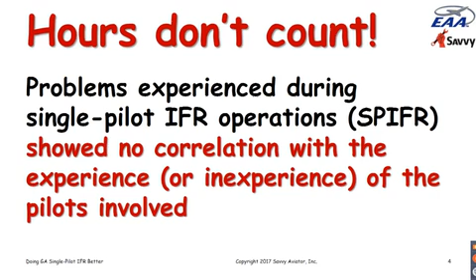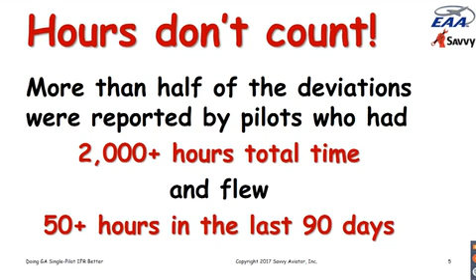Some of the findings of the Battelle study were pretty counterintuitive. For example, they found that hours don't count. The problems experienced during single pilot IFR did not show any correlation with the experience or inexperience of the pilots involved. In fact, more than half of the deviations were reported by pilots that had more than 2,000 hours total time and flew more than 50 hours in the last 90 days.

So these were very active and experienced pilots making these errors. It also turned out there was no significant difference in the types of problems experienced by high-time pilots versus low-time pilots, or by pilots of larger aircraft versus smaller aircraft. Those conclusions I found kind of surprising, because one would intuitively expect that higher time pilots and pilots of larger aircraft would make fewer mistakes, but it turns out that they don't.

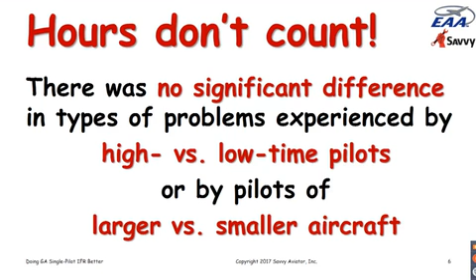The conclusion of the study was that the remedies to the problems GA pilots face flying single pilot IFR don't lie in more training or having more experience, but rather in changing the nature of the single pilot IFR task itself through improved cockpit discipline. And that's what we're going to be talking about for the next half hour or so.

The reports studied in the Battelle study were overwhelmingly pilot deviations. There were some reports where pilots were complaining about inadequate ATC service, but by and large the study was focused mainly on pilot deviations. So we'll talk about pilot deviations, and here's a breakdown of the kinds of deviations, the broad classes of deviations that Battelle found during the study.

By far the largest number, 43%, were altitude busts of some sort or another. Bad approaches and heading deviations each accounted for around 20%. Position deviations, where an aircraft was simply off course, were about 10%. Loss of control was 5%, and other was 2%.

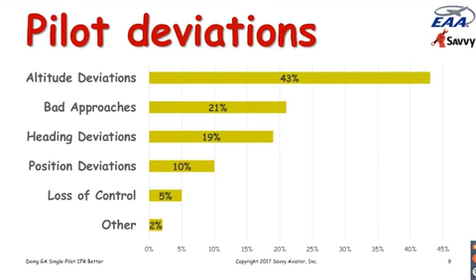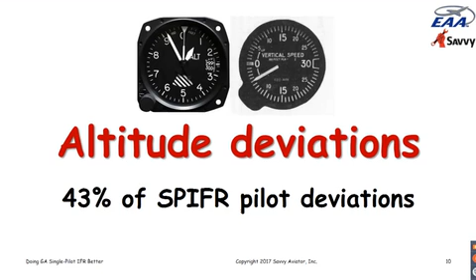So altitude deviations were by far the largest segment of the stupid pilot tricks that came out in this study. And the altitude deviations came in a number of flavors. The overwhelming majority of the altitude deviations were where a pilot was in a climb or a descent and overshot the assigned altitude.

Some other kinds of altitude deviations represented a smaller percentage, where a pilot changed altitude prematurely, undershot the assigned altitude rather than overshooting it, failed to change altitude when ATC instructed a change, or failed to maintain altitude. But the overwhelming majority of these deviations were overshoots, where the pilot was climbing or descending and simply didn't stop at the assigned altitude.

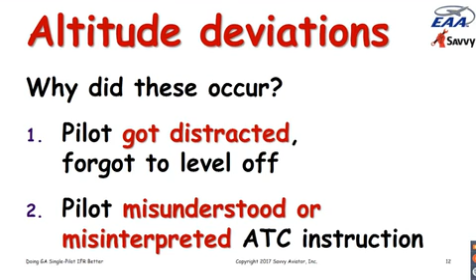Why did these altitude deviations occur? Battelle felt there were two reasons. One was that the pilot got distracted, and distractions are clearly a problem with single pilot IFR, because when workload is high, it's difficult for one person to keep track of everything. The second cause was that pilots misunderstood or misinterpreted the clearance they got from ATC, and so didn't really understand what altitude assignment they were getting.

And the misunderstandings came in a number of flavors. In cases where pilots misunderstood or misinterpreted the clearance, about half the time the pilot wound up climbing or descending to an altitude assigned to a different aircraft. Other lesser causes were climbing to the flight planned altitude rather than the cleared altitude, climbing to a requested altitude where the request hadn't been granted but they did it anyway, or in a few cases, climbing to the habitually expected altitude - where a pilot flying a route he flew a lot was used to being assigned a particular altitude, and in this case was assigned a different altitude, but climbed to the one he normally expected.

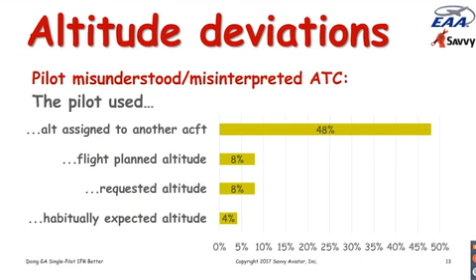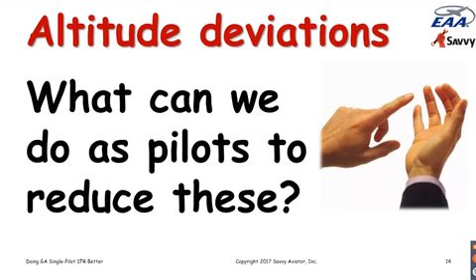So what can we do as pilots to reduce altitude deviations like this? It seems to me there are several things we can do. First, never act upon a climb or descent clearance unless you're 100% sure it was meant for you and not another aircraft. Again, the majority of altitude deviations were due to misunderstandings or misinterpretations, where an aircraft acted on a clearance intended for a different aircraft. So unless you're 100% sure a clearance was meant for you, always query ATC about it.

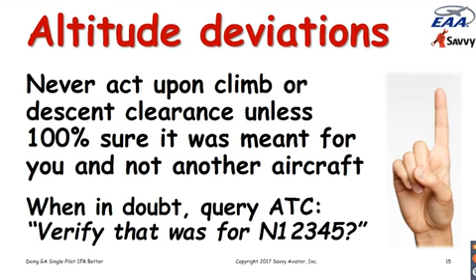Verify that this was for November 1, 2, 3, 4, 5. A second thing - because the majority of altitude deviations were overshoots, where the aircraft was climbing or descending and just climbed or descended right through the assigned altitude - is that every aircraft flying IFR really needs an altitude alerter. And nowadays you can buy them very inexpensively. I can tell you an altitude alerter is worth its weight in gold.

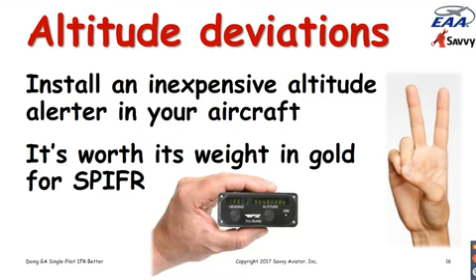I don't know how many potential altitude busts my altitude alerter in my Cessna 310 has saved me from, but it's absolutely worth its weight in gold. So if you're flying IFR in an aircraft without an altitude alerter, you really need to put one in. And it isn't very expensive nowadays - there are some very inexpensive ones under $1,000.

The third thing we can do, a habit I developed many years ago, is that when ATC assigns you an altitude, don't read it back immediately. First dial it into your altitude alerter, then read back the altitude you've dialed in. If you do it that way, it's impossible to read back the altitude correctly and dial it in wrong. Instead of reading back what the clearance was, you're reading back what you dialed into the alerter.

Now, if you don't have an alerter, and you really should have one, you could use the same procedure with a Post-it note. In other words, when you get an altitude assignment, first write it down, then read back what you wrote. Don't read it back immediately and then note it down, because there's a potential for mistake that way.

There are some other things you can do. If you have an ADF with a rotatable card, you can use it as a place to dial in altitudes. But an altitude alerter that actually beeps when you're approaching the assigned altitude is really worth its weight in gold, so it's a really good idea to have one.

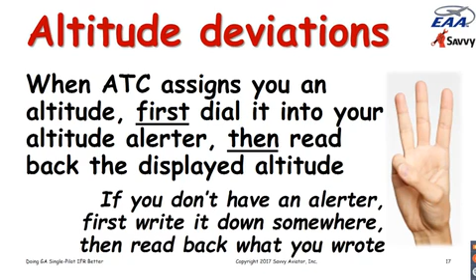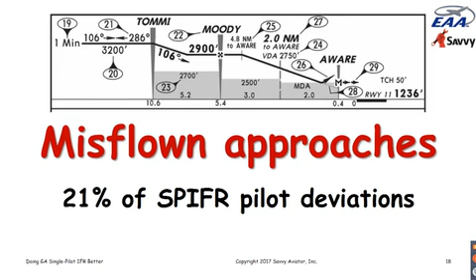Okay, the next most common category of pilot deviations were misflown approaches. They represented 21% of the single pilot IFR deviations. Now, the instrument approach is obviously the most workload intensive phase of any IFR flight, and because it's low to the ground, the consequences of making a mistake can be very, very serious.

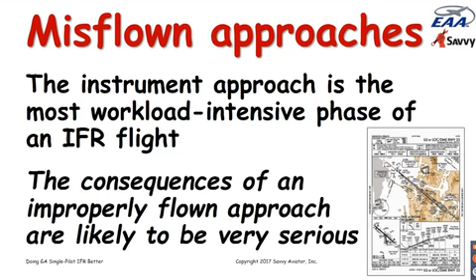Interestingly enough, and this was another counterintuitive thing, the study found that there was no correlation between pilot deviations and the type of approach flown. One might reasonably expect that more difficult approaches, typically non-precision approaches with lots of step-down fixes, would have a lot more pilot deviations than something like an ILS, where you're simply tracking the glide slope and not having level-offs. But that's not what was found. Half of the approaches that were screwed up were ILS approaches, which are normally considered to be the easiest of all approaches to fly.

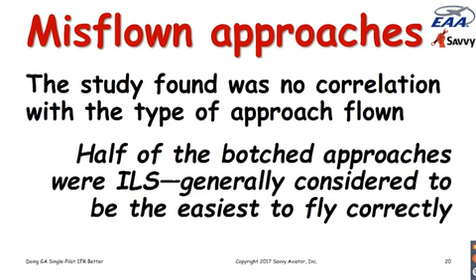A major factor in a lot of these misflown approaches was lack of positional awareness, flying a divergent heading that never intercepted the final, flying a localizer and never intercepting the glide slope, that sort of thing.

I think probably if the study were repeated today, there would probably be somewhat less of these, simply because now we all have GPS-driven moving maps in the airplane, which help a lot with situational awareness.

Another common error was unexpected course reversals. Typically, the pilot flew a procedure where ATC expected him to go straight in, but the pilot executed a procedure turn or a holding pattern that ATC didn't expect. In one somewhat humorous case, a GA pilot was assigned the runway 27L ILS at Chicago O'Hare and wound up making two 360s, causing the controllers to scatter a whole slew of airliners in all directions because the pilot did something that the controllers didn't expect.

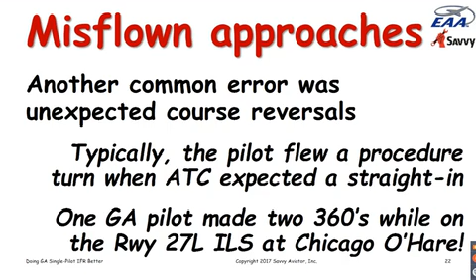Another thing that the study found was that the probability of a misflown approach was particularly high on second-try and third-try approaches, after the pilot had already missed one or more approaches.

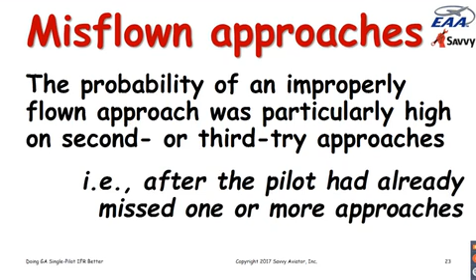So what can we do as pilots to reduce misflown approaches? Well, first of all, as I mentioned, we all have GPS-driven moving maps in our airplanes nowadays, whether they're panel-mounted or yoke-mounted or both, or an iPad or whatever. So use your GPS-driven moving map to help you stay positionally aware so that you don't do something that deviates from the approach.

I use a Garmin 696 on my yoke, an iPad mounted on my left cockpit window, and a Garmin 530 on the panel. So at any given time, I'm staring at three GPS moving maps, and if I get off course, there's not much excuse for it. The equipment that we have reasonably available today really helps in this area.

Second of all, use your altitude alerter to prevent inadvertent descent below minimums. Most altitude alerters have a decision height feature where you dial in the decision height, and then it provides you an aural alert when you get there. For non-precision approaches where you have a bunch of step-down fixes, dial each successive step-down into the alerter so that you can't bust that altitude.

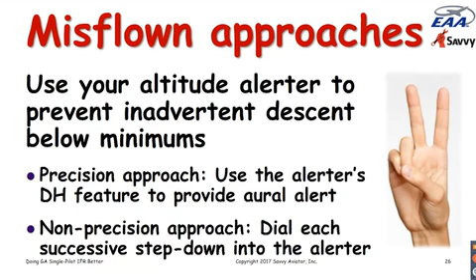And finally, never make a procedure turn or a hold in lieu of procedure turn unless you're absolutely positive that the controller is expecting it. Nowadays, procedure turns and holding for the approach is the exception rather than the rule, because we're in a radar environment.

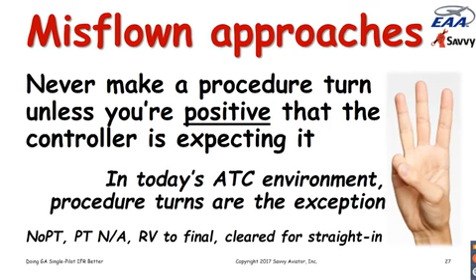Finally, think very, very carefully before attempting a second try approach. Missed approaches are due to one of two reasons: either the weather was below minimums, or the pilot was too tired or too rusty to fly the approach accurately. In both cases, things aren't going to get better on the second approach. So usually, if you miss an approach, diverting to an alternate with better weather is the wise choice. A lot of people have augured in after missing an approach and going back for a second or third try.

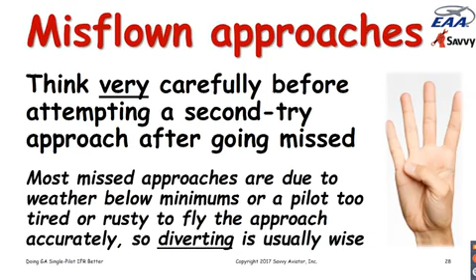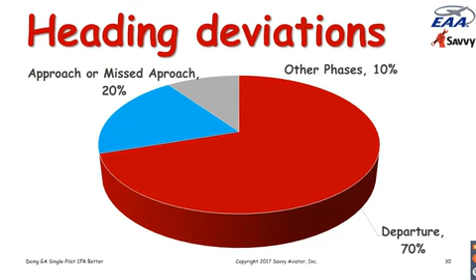The third category are heading deviations. Heading deviations occurred mostly during the departure phase, interestingly enough. 70% of them during the departure phase, 20% during approach or missed approach, 10% during other phases of flight. I found that a little surprising that the departure phase was the predominant phase during which heading deviations occurred, but that's what the study showed.

The breakdown of heading deviations: 44% wandered off of the assigned heading, 19% flew the reciprocal heading, 180 degrees from what they were assigned. 20% roughly failed to turn to the heading after they were given it, and 9% turned the wrong way. They were asked to turn left to a heading and turned right, or vice versa.

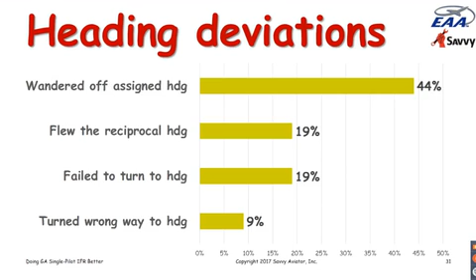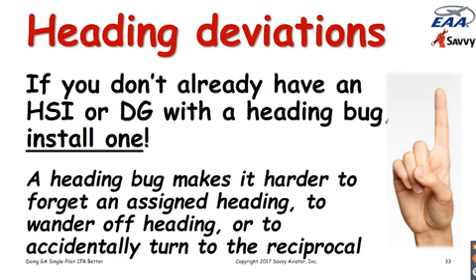So what can we as pilots do to reduce these kinds of heading deviations? First of all, if you don't have a DG or HSI that has a heading bug, you need to put one in. In the same way that we need an altitude alerter to remind us of altitudes, we need a heading bug to remind us of heading assignments. Having a heading bug makes it much harder to forget an assigned heading, or to wander off the heading, or to accidentally turn to the reciprocal, because we dial the assigned heading into the bug, and we have it sitting right in front of us on our compass card, where it's very, very hard to make a mistake.

If you have an autopilot with a heading hold feature... I personally consider an autopilot pretty much a no-go item when I'm flying single pilot IFR. In my early days, when I was younger and probably less wise, I did a lot of single pilot IFR without an autopilot installed. But nowadays, if I have an inoperative autopilot, I won't fly more than about an hour single pilot IFR, because hand flying single pilot IFR is just extremely fatiguing. Anyway, assuming you have an autopilot with a heading hold feature, use it, particularly anytime your attention is diverted. If you think about airline operations, those guys fly on the autopilot 99 and 44% of the time, and it's a good habit for GA pilots as well.

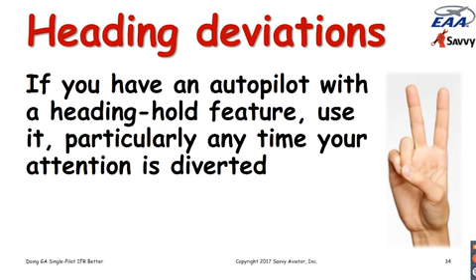When ATC assigns you a heading, the same thing that we talked about with altitude applies here. When you get the heading, dial it into the heading bug first, then read back the heading that you dialed into the bug. Don't read back the heading and then dial it. If you dial it first, read it back second, it's impossible to read back the heading correctly and dial it in incorrectly, which is a pretty easy thing to do if you don't follow that procedure. Again, if you don't have a heading bug, and you really should, use a Post-it note or a rotatable ADF card or something to record the assigned heading, then read back what you recorded. There are a number of different kinds of heading reminders that you can pick up very, very inexpensively.

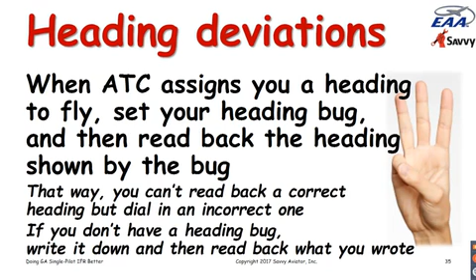As far as turning in the wrong direction, a heading bug makes it pretty obvious which way is the shorter way to turn. If the controller clears you to turn in the opposite direction, it's usually a good idea to confirm with the controller and say, verify that you want me to turn the long way around to whatever the heading is. Sometimes that's the case. That happened to me two days ago when I was departing Hawthorne, and the controller gave me a long way around turn that was a 270-degree turn. It's kind of an unusual clearance, so I verified it back to him that he wanted me to turn the long way around. You just want to make sure so you don't wind up turning the wrong way, the opposite way that the controller expects, inadvertently.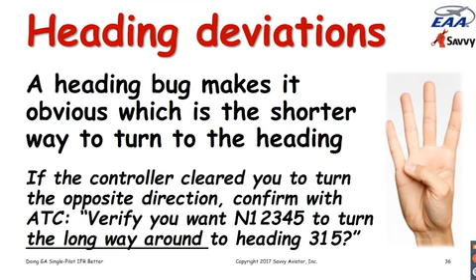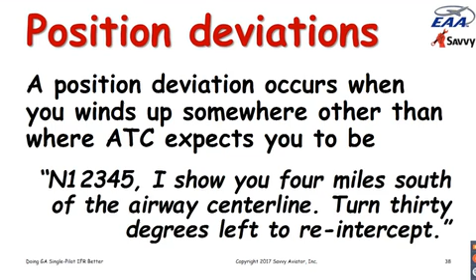Position deviations represented 10% of the pilot deviations, and a position deviation was when a pilot wound up somewhere other than where ATC expected the pilot to be. We've all probably had calls from ATC saying, say your position, or indicating that the controller didn't think you were where he expected you to be.

Almost all the reported position deviations in this study occurred during the cruise phase of flight, mostly while the aircraft was out of radar contact.

I'm just thinking back, the last position deviation I remember having was a case where I had put a fairly complicated route into my GPS navigator that the autopilot was flying, and I accidentally forgot a fix. So the airplane was flying what I programmed into the computer, but that wasn't the correct route because I'd left out one fix, and ATC called me on it. Very embarrassing.

In most cases in the study, the pilot was not aware of wandering off course until ATC said, say your position, or gave a turn to re-intercept or something like that.

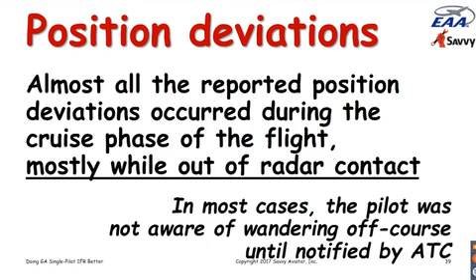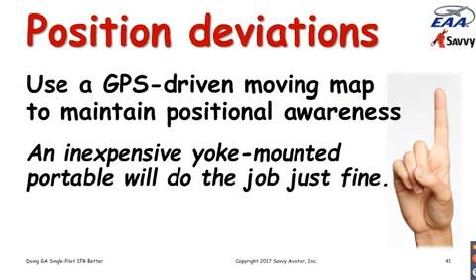Anyway, what can we do as pilots to reduce these position deviations? Again, use a GPS moving map to maintain positional awareness. A yoke-mounted portable does the job just fine, but you need to make sure that when you program your route into the box, that you do it accurately.

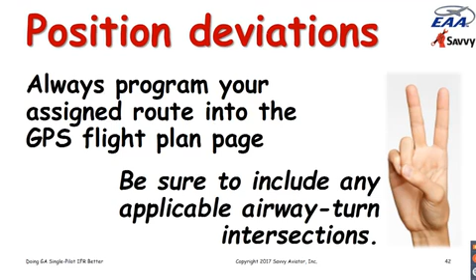The trick is to go over your route and make sure that you've entered all applicable turn points, whether they're VORs or intersections. You have to make sure not to forget any, or you'll wind up going off course. Again, if you have an autopilot with a navigation tracking feature, use that feature, especially anytime your attention is diverted.

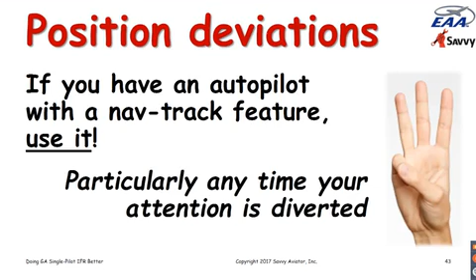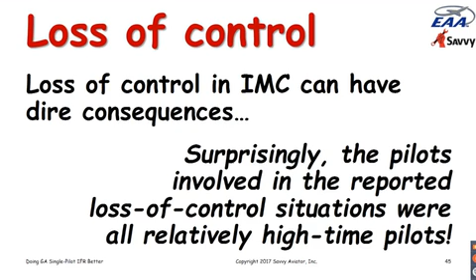Finally, 5% of the accidents involved loss of control. Obviously, loss of control in IMC can have very serious consequences. Surprisingly, the pilots involved in the reported loss of control situations were all relatively high-time pilots. Again, this is not an experience issue.

Most of the loss of control episodes involve pilots who got distracted and focused on something else other than flying the airplane.

I'm sure everybody remembers that L-1011 crash in Florida many years ago, where there were 3 crew members in the cockpit, and they were all trying to troubleshoot a problem, and none of them realized that the autopilot had disconnected. The airplane was flying without anybody paying attention, and it very slowly and majestically descended into the Everglades with 3 pilots up in the front office focusing on something other than flying the airplane.

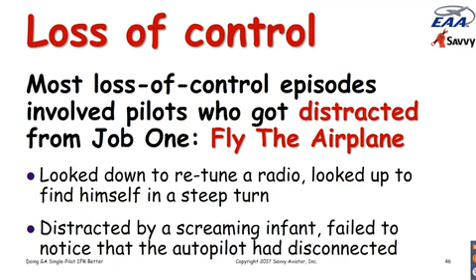Some of the loss of control episodes in the Battelle study included one where a pilot looked down to retune a radio, then looked up to find himself in a steep turn, or got distracted by a screaming infant and failed to notice that the autopilot had disconnected. That sort of thing - they're typically distractions.

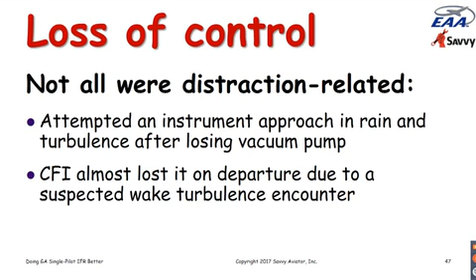But not all of them were distraction related. In one case, a pilot attempted an instrument approach in rain and turbulence after losing a vacuum pump and wound up not having any way to keep the dirty side down. In another case, a CFI almost lost it on departure because of a wake turbulence encounter. But most of them were distraction related, with the pilot fixating on something and forgetting to fly the airplane.

So what can we do about these things? Always engage the autopilot whenever you need to divert your attention to non-attitude flying tasks, and monitor the autopilot frequently. Make sure the audible disconnect warning is working, so that if the autopilot does decide to disconnect, you'll know about it.

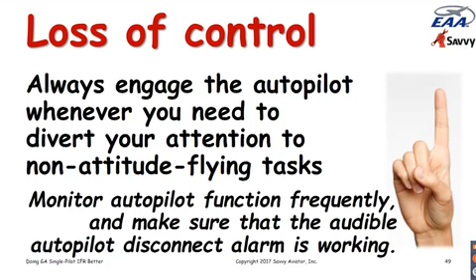Do what the airlines do: establish and enforce a sterile cockpit rule during the departure and approach phases of flight. Generally the rule is that anytime you're below 10,000 feet, there's no talking and a complete focus on flying the airplane. If you have passengers in your airplane, inform them ahead of time that you can't talk to them during these high workload phases because you don't need the distractions.

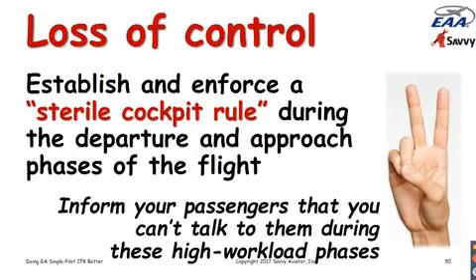So at any rate, there are some recurring themes in all of this, but clearly it's all about cockpit discipline. Use a GPS moving map. Use reminder devices like altitude alerters and heading bugs. And if you don't have one, although you really should, find some substitute that will remind you of altitudes and heading assignments. Dial each new altitude, heading, or frequency into the altitude alerter, heading bug, or radio first, then read back what you dialed in. That way you can't read it back correctly and then dial it in wrong. Use your autopilot, especially when your attention is diverted from the flight instruments for any reason.

Professional pilots use their autopilot most of the time, and a lot of them have two or three pilots in the cockpit, but they still use the autopilot. Your job really shouldn't be flying the airplane; it should be monitoring, and let George fly the airplane.

If you have any doubt about an ATC clearance, if there's any chance it might have been intended for another aircraft, always ask for verification. I find myself doing that a fair amount. Yesterday, or the day before, I had a clearance issued, but the first part of the call sign got stepped on. I was pretty sure it was for me, but pretty sure isn't good enough in this business. So I called ATC and said, verify that clearance was for November 2638 X-ray. You just need to be cautious on these things.

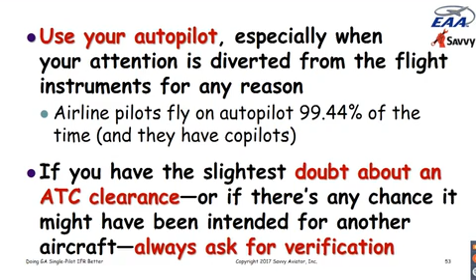If you miss an approach at your destination, it's probably a sucker's bet to try the approach a second time. It's probably not going to get better, and you're probably not going to get less fatigued. So the better part of valor is generally to divert to somewhere else where the weather is good and sort things out on the ground. There are too many pilots that have bought the farm doing second and third try approaches.

So, Tim, that's about all I have as far as prepared stuff, and I will be happy to do some Q&A if we have time.

Okay Mike, yeah, we got plenty of time here. We do have some questions that have come in so far, so let's start right off with Ray's question at the top. He says, in hard IFR, what temp above 0 do you recommend for winter flying?

Well, I'm not clear on the question. I guess it has to do with structural icing. One of the things that's important is to make sure you have accurate OAT information in the cockpit. I've discovered that OAT gauges frequently are several degrees off. In my aircraft, I put an outside air temperature sensor on my JPI engine monitor, which gives me a digital OAT display, and it also gives me the ability to program a correction factor into the instrument. If I'm picking up a little rime ice or something, I will descend and note exactly when the ice starts to melt. If my OAT readout is not reading 0, I will adjust the fudge factor in the instrument so that it reads exactly 0 right at the melting point of water.